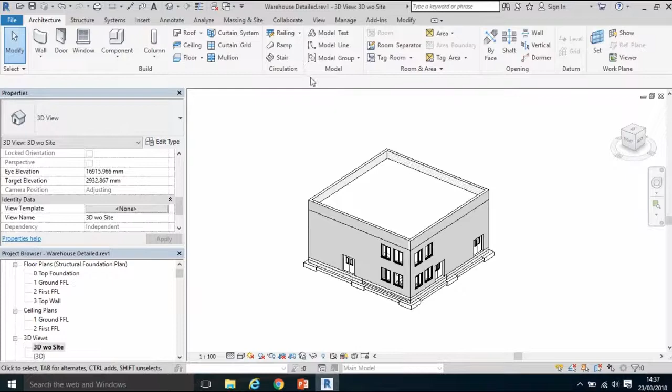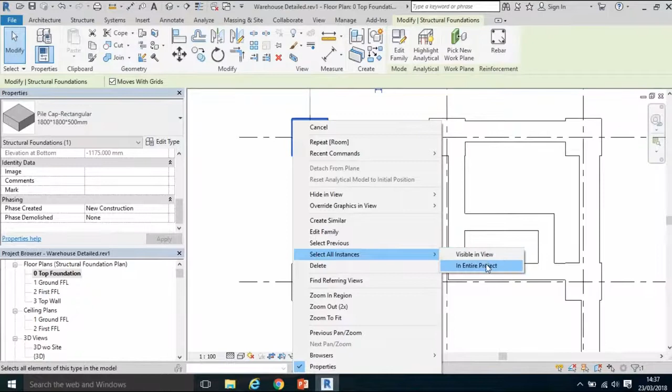To start, I'm going to click the ground floor or foundation view, and select, for example, one of the pads. Now I can see that that's the pile cap. I'll right click it and select all instances visible in view, or in the entire project. In this case that would be fine.

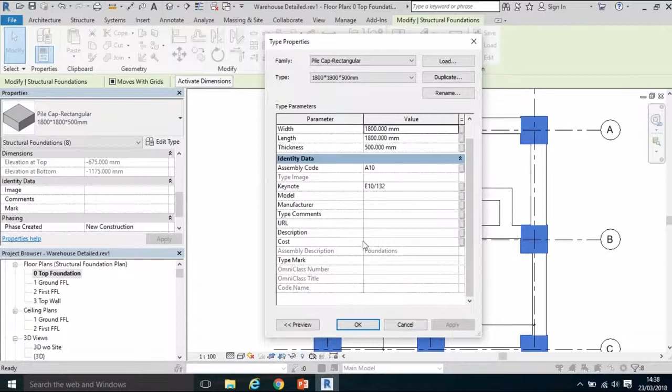I'm going to check if there's an object or property parameter I can use to input what that element number is, and there is. I can use the comments field, or edit type and put it into the description text parameter. I'll use the comments field, put in 19 substructure, and click apply.

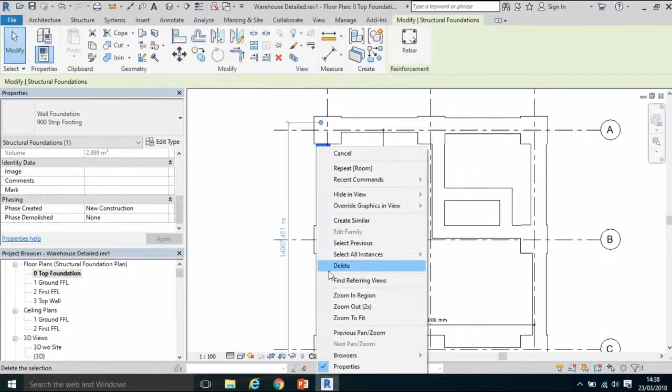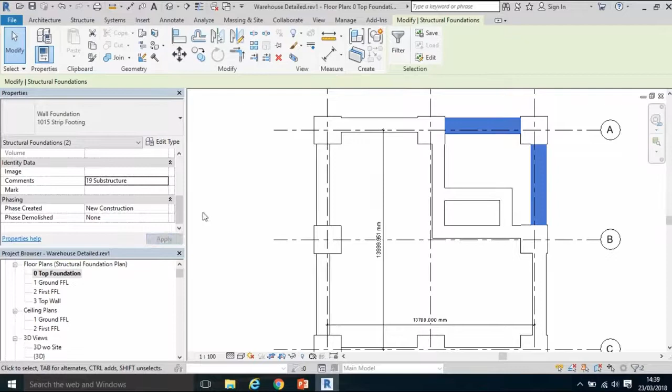So now if I pick one, I should see it down there, and I do. I'll do the same for the strip footings or ground beams, select all instances in the entire project, type element 19 substructure, and click apply. Same for these two 1015 wide ground beams, select all instances in entire project, type 19 substructure, click apply. I'm going to click the ground floor.

I can also do it for the walls. Let's say I want to apply it to that basic wall there. Right click, select all instances in the entire project, and there we have it on the ground floor plan. It's done the same for the first floor and top of parapet walls. I just can't see it because this is the only one I have in view.

Scroll down, this one is element 21, external walls. Click apply. So again, if I select one individually, I should see it in there.

So that's done for all those objects. Again, if I pick one of the internal walls, right click, select all instances in the entire project, it selects all those particular objects in the entire project, and I'm going to type in element 22, internal walls and partitions.

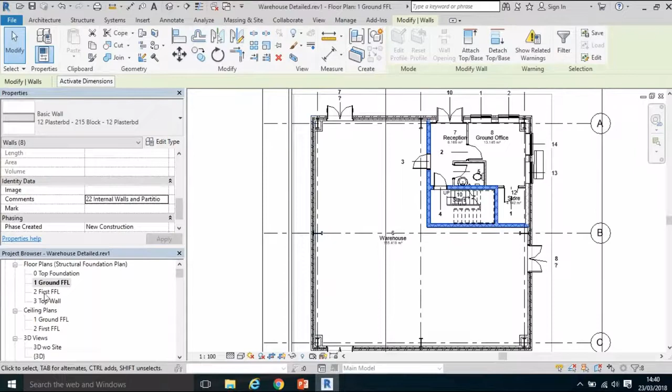I would essentially go around that BIM model. I can do it in any particular view, in the 3D view selecting certain walls. I can already see that one has the external walls coded. I could click the roof, put the roof element in, click the windows, select all instances, put the windows element in, and code pretty much every single object I can in the model.

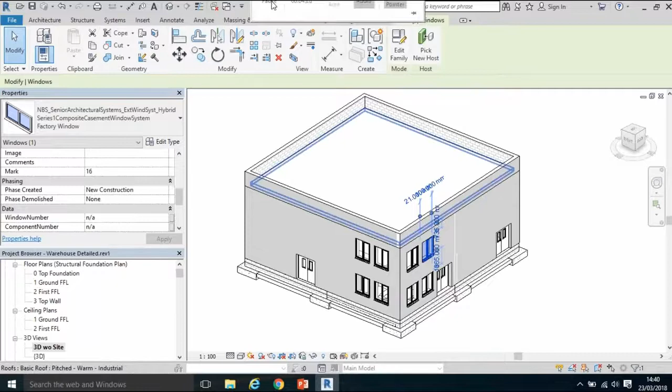So go ahead and do that. I've coded that to the best of my ability, working through some 2D views, possibly coding it in 3D, and even using any sections available to me. I can create my own sections, and I'll show you how to do that in a few moments, but sections are quite handy for coding because I can get into internal objects I can't see in other views.

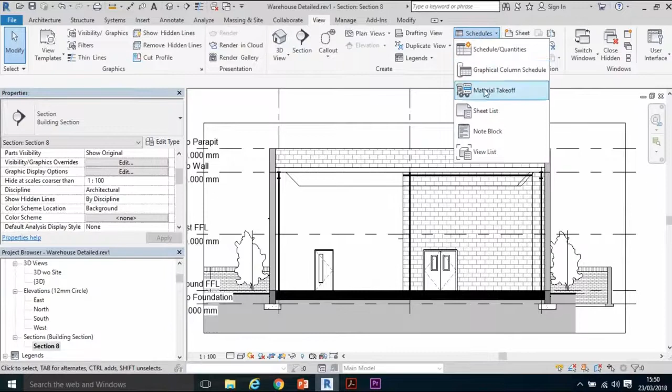Now I want to check that all my objects are coded. One way is to click View at the top and create a schedule. So View, Schedules, drop down, create a material takeoff. What comes up is a multi-category material takeoff, and I'm going to leave it as a multi-category takeoff and click OK.

The fields I'm going to use, I certainly need the comments field. If I scroll down, it's in alphabetical order - comments, and comments is the parameter I use to put in my QSID. I'm going to continue on. The next one I'm going to use is family.

So I've added more fields there: family and type, material name. I might take the material area and the material volume. These are fairly typical naming conventions in Revit that should capture most of my objects, or at least the appropriate name of most of them. I've also thrown in the actual material name, and some quantities that may come up, just to show you they're available in schedules.

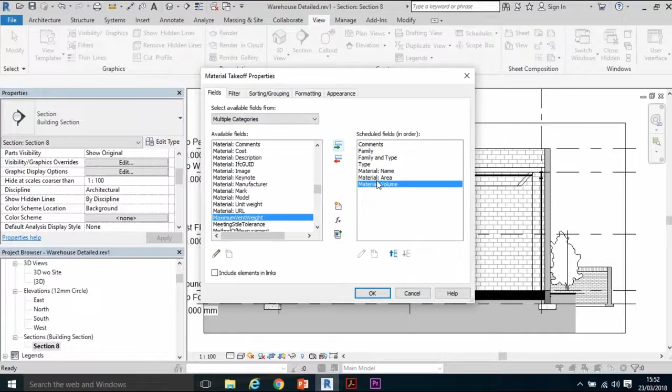Once I've done that, click OK. This is essentially my schedule. Now I can increase the row width to see exactly what's going on, and there I can see my material area, my material volume. Just to make sure all my objects are coded here, I can see there's codes, or a QSID, against most of those objects.

Keep scrolling down to see if there's any fields missing. Oh, and there's a few here. This looks like it's a rising wall, so that will be element 19. So I can go ahead and type it in.

Substructure, for those last few items. Substructure. There we go. Keep going just to make sure, and I can see there's codes. If something wasn't coded, it should show up blank, like I just showed you, and you can go ahead and type the field in there.

Once you've completed your schedule and you're happy with it, you have the opportunity to keep it in Revit, but you also have the opportunity to export it. To do that, I'm going to export it to Excel. It's a little bit of a long-winded process, not as straightforward as you might think, but you click File at the top left-hand corner, click Export, scroll down to or click the little arrow, Reports, and click Schedule.

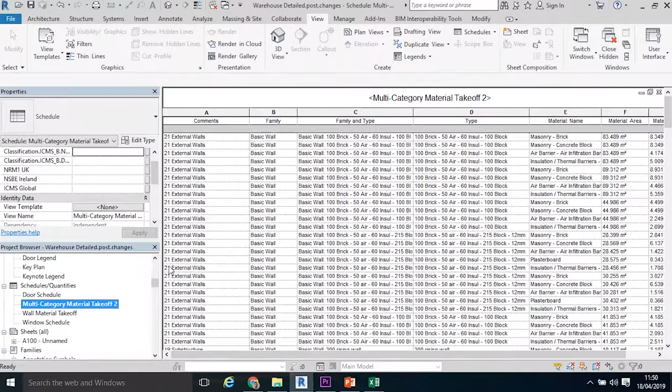So I'm going to move back now to Revit. One thing that doesn't come in the multi-category material takeoff schedules are room information. I'm going to scroll back up to my ground floor plan, and if you can remember previously we inputted some rooms and named those rooms. Let's say for example I hover over the ground floor office, and select that.

Up comes this particular room in the room properties. If I scroll down to the identity data, it'll give me the name and number of the room. In this case it's the ground office, but it'll also give me some parameters here in respect to finishes. So what I'm going to do is, for example purposes, fill out some of this information.

Let's say the ceiling finish is painted plasterboard, and the wall finish is painted blockwork, or also painted plasterboard. And the floor finish is carpet. Click apply, and I can repeat that process for all the rooms on my ground floor and do the same for the rooms on my first floor, adding that information in there.

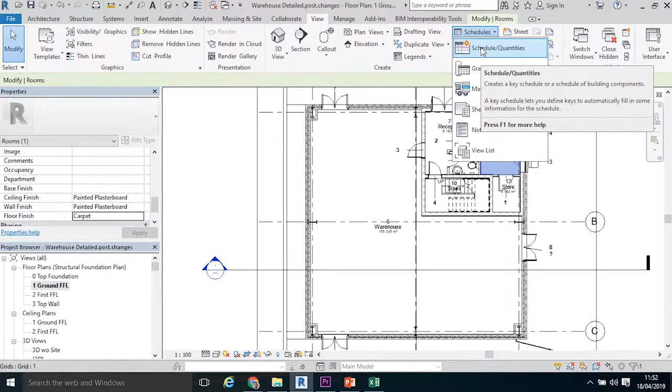Once I've done that, one way to check, just like the material takeoff schedule, that all information is in there is to create a schedule. So again, the same way I did before, click View, click Schedules. This time, instead of material takeoff schedule, I'm going to select Schedule/Quantities, and I'm going to scroll down to my option for creating a room schedule. So there we have it, rooms, schedule building components checkbox, room schedule, click OK.

Now again, I want to import in some fields here, and I might start with, in order, the number, bring that in, the name, bring that in, and then I'm going to add in the finishes. So ceiling finish, floor finish, and wall finish, which will probably be down the end.

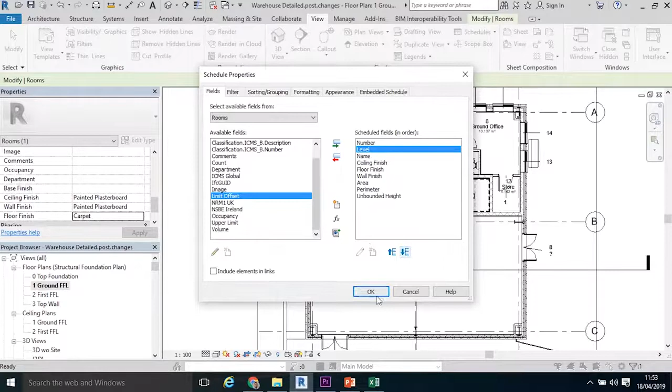And from there I'm going to add the quantities: area for sure, and also perimeter and unbounded height. There's nothing in the volume right now. I might even bring in the level it's on, move that up in between number and name, and click OK.

So what you'll see here is essentially the number, the level it's on, the name. If there is information in there, you can see that we've already put that information in the ground floor office: painted plasterboard for the wall finish, and carpet for the floor finish. I also have an area, a perimeter, and an unbounded height. What I'm missing there is a wall area, so I can add that.

To show you how to do that, you would click Insert in the Modify Schedule Quantities. This time though, I don't have an available field here to bring in; there is no wall area calculation. So what I'm going to do is create one. I've got the little FX here, which is add a calculated parameter. If I select that, I'm going to call it wall area.

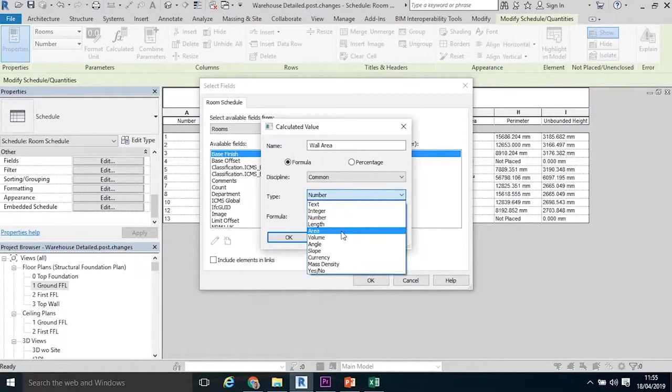I am going to click formula here and create the formula with three dots. If I say my perimeter times my unbounded height, and then close the brackets, and then change it from a number type to an area type, otherwise that won't calculate correctly. Click OK, and now I've got a wall area in there.

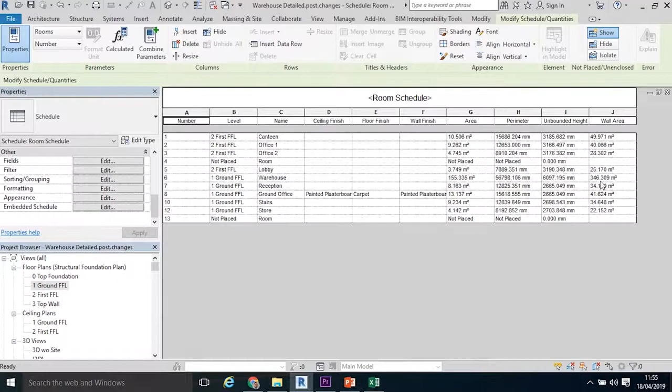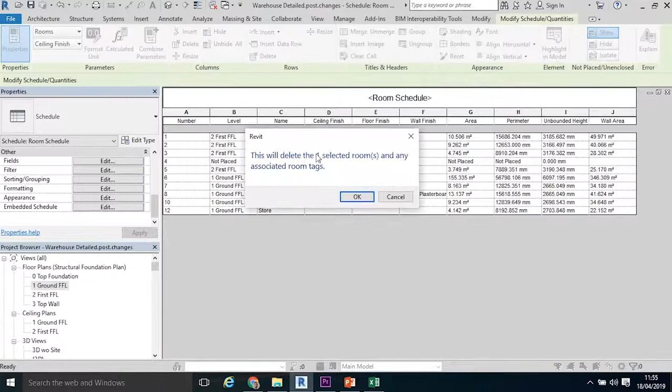Click OK again, and I have got some wall areas. I'm going to delete some of the rows here that aren't quite coming out right. So if I click delete there, click that row, it looks like it's some sort of a duplicate. Click that row, and there we have a good room schedule.

Now again, I've got to remember that I can actually input the floor finishes in office 1, carpet, office 2, carpet, etc. So I can also input the finish information in my schedule, as well as what I showed you earlier in the actual room properties.

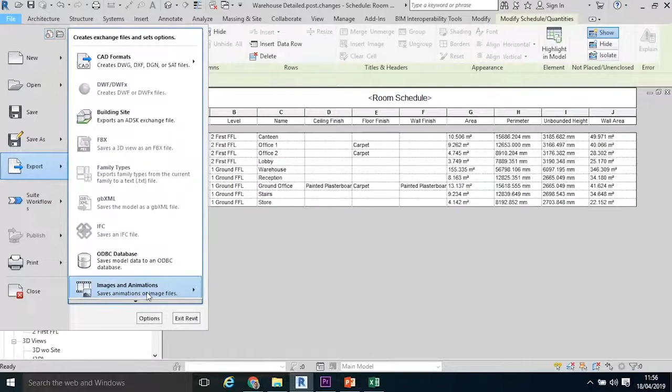Again, as I showed you a number of minutes ago, if you click File, click Export, click down to Reports, and export your schedule just like you exported your material takeoff, and import it into Excel. You can add room information into your Excel spreadsheet. Thank you.